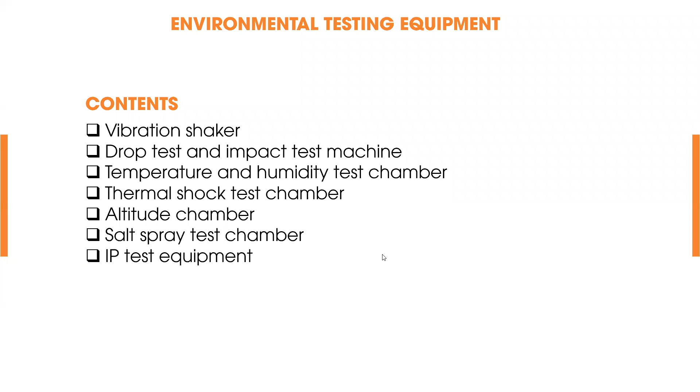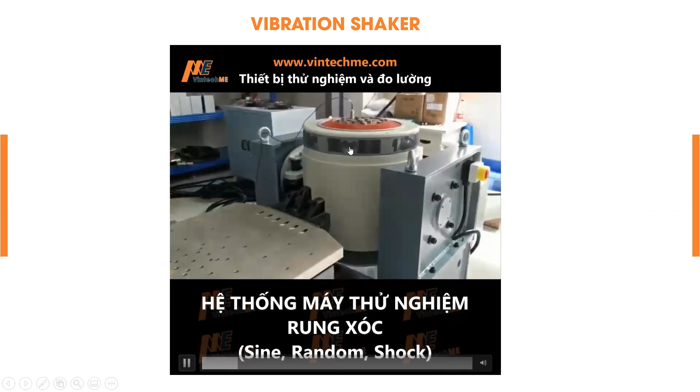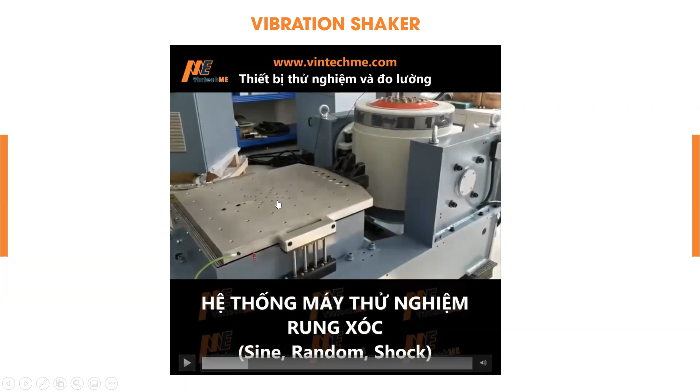So you can see this is the vibration shaker, and this is the sensor, vibration pickup. Now you can see, so it's working. It's vibrating. This is the horizontal table, to make the vibration follow the horizontal direction.

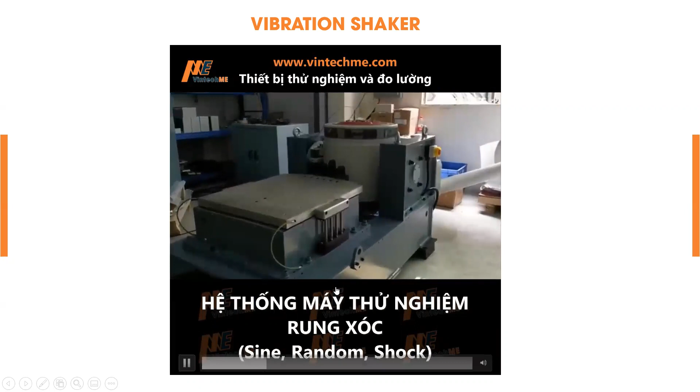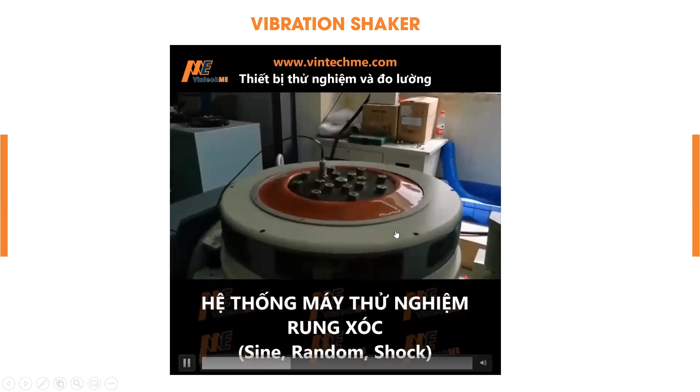Okay. Can you hear the music from the video? Yes. Okay. This microphone is okay.

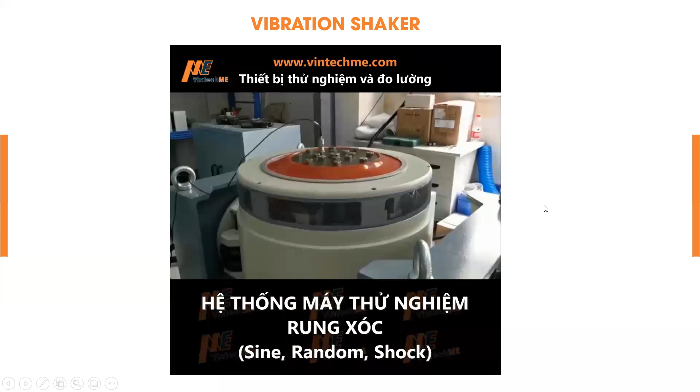Okay. We already finished with the vibration shaker, and now go with the drop test. You can see here, this is the drop test machine. This is a basic drop tester, used for checking the package, a free fall drop test machine. So for example, we need to test some carton box that during transportation has some impact when it's dropped down onto the floor. We will use this machine.

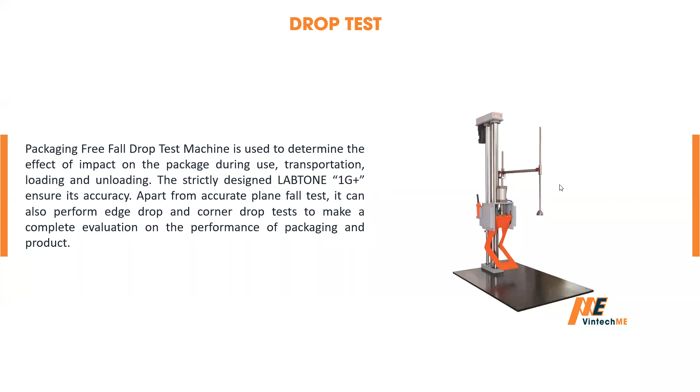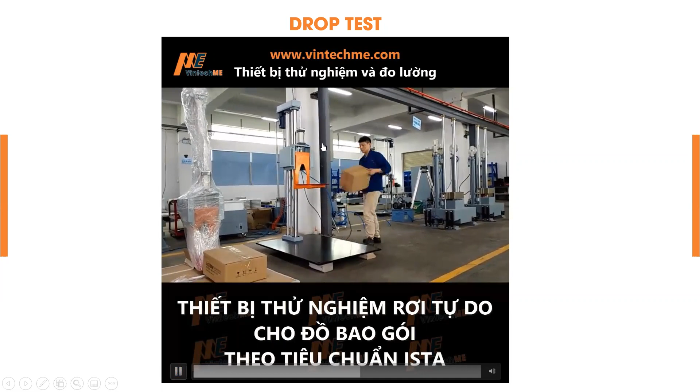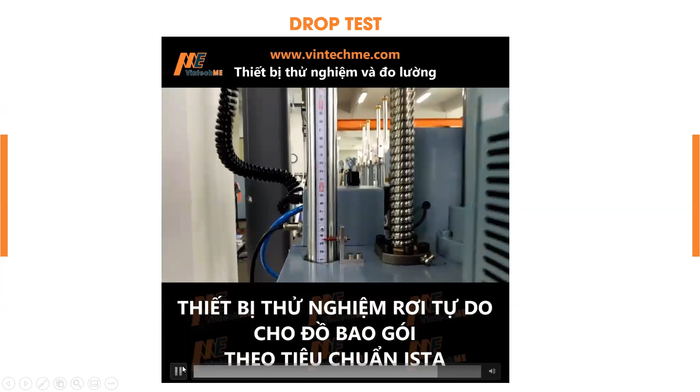Very easy test. Okay, so yes. Now let's go with another, incline impact. Yes, incline impact test. Incline just means nghiêng.

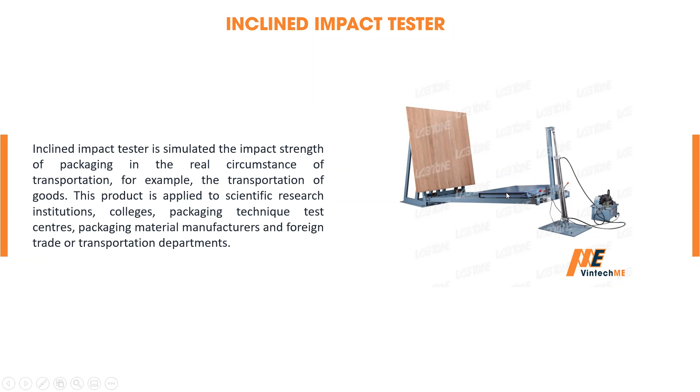So incline impact tests are not popular in companies. In fact, I never saw this one in real life in the test lab, but several companies use this test machine. So this is for carton boxes. Yes, for carton boxes. You can see how it works in this video.

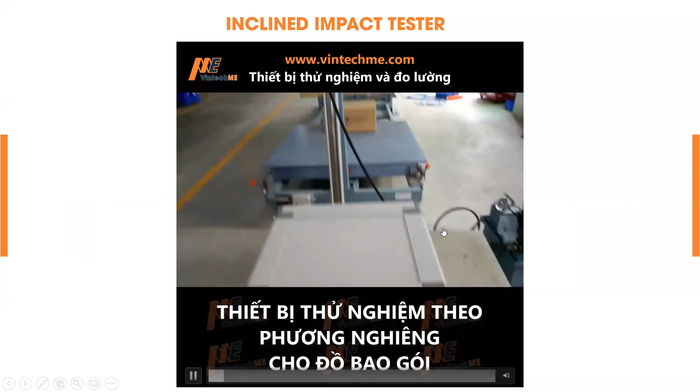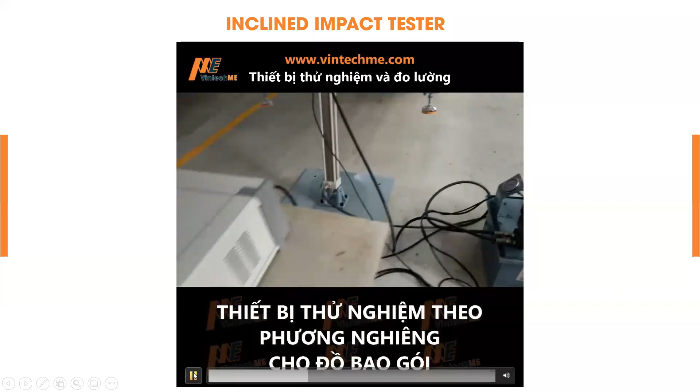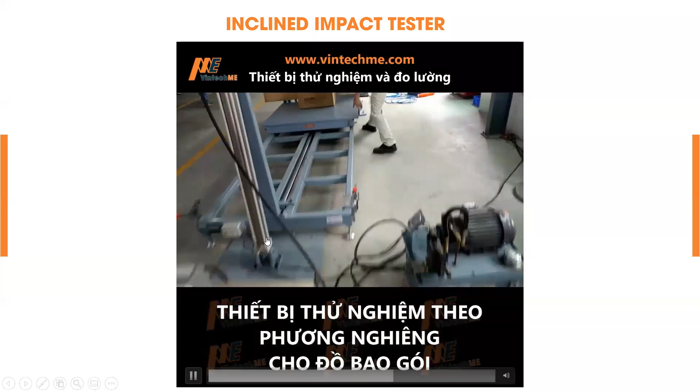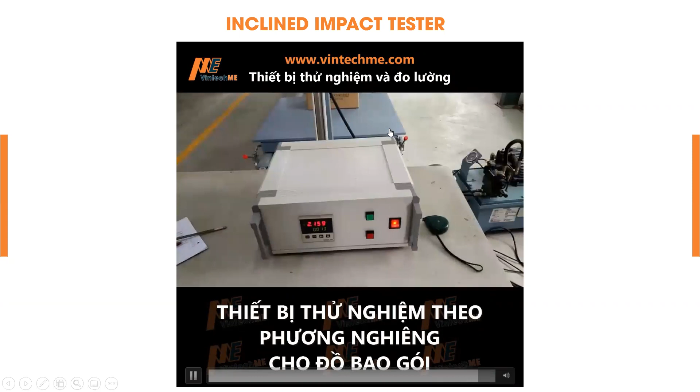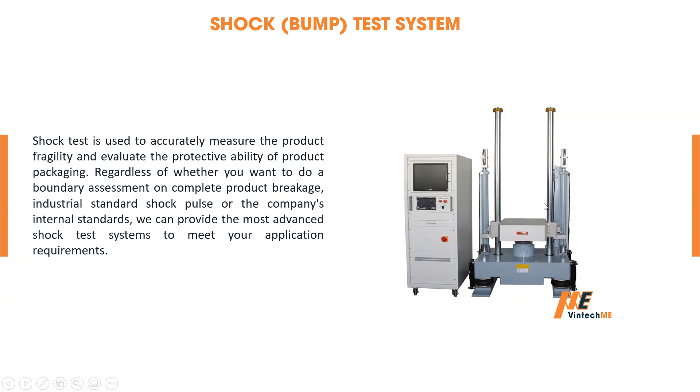So yes, this is a shock test system. And sometimes we call it a bump test system. So this is the table, shock table, bump table, and this is the amplifier to control the shock testing, with an easy structure. Now let's see how it works in this video.

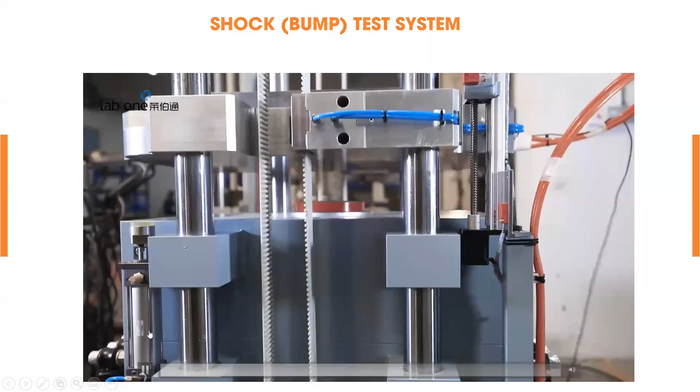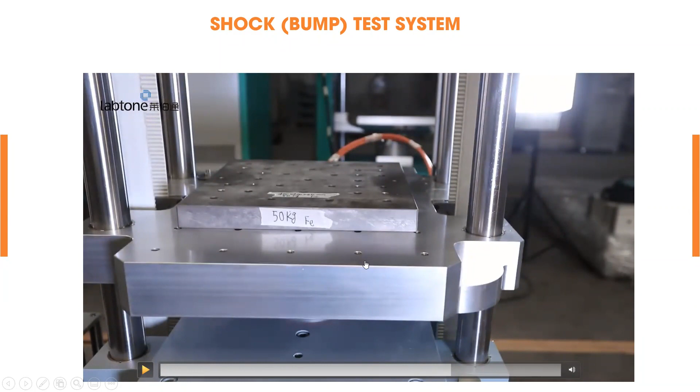So you can see this is a test sample, 50 kilograms. In fact, this is an iron cube. So they attach it to this table. This is the shock profile, the waveform. How to get the waveform? How to calculate? When we perform the testing, we only input and choose the test profile. Yes, I understand. But how to select the profile?

So firstly, it's not difficult. I think it's easy, because in the software we can put in some data. The programmer kit is very important. But this mechanical one is different from other shock, because with mechanical it's not easy to calculate how much acceleration, how many G, to calculate and to program in the software.

For example, UN 38.3 requires 150G and a duration of about 6 milliseconds. But in fact, when you test, the display is not the same, the value is very different. So normally when I performed testing when I worked for IMV, to perform the shock test I would do a trial test first to check whether the profile is the same or not.

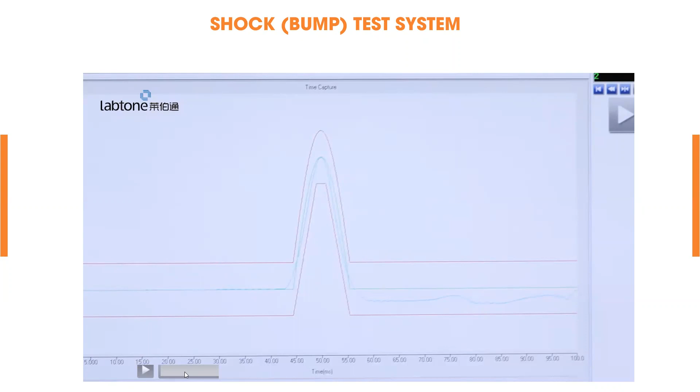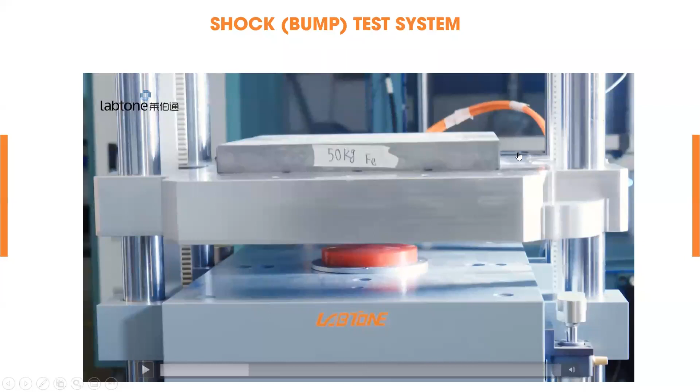In fact, with bump test, mechanical shock test, I have not used it before. Yes, this one is not popular. But this machine is very expensive. I see. I can explain the program later for you if you want more detail. Okay, I can continue.

This one is the thermal shock test. I think it's not popular. Normally, a thermal shock test chamber is very expensive. You can see this is the thermal shock test profile. From hot to cold is a very fast time. This is minus 40, increasing to 120. After that, suddenly down to around minus 40 again in a short time. This is the thermal shock test profile.

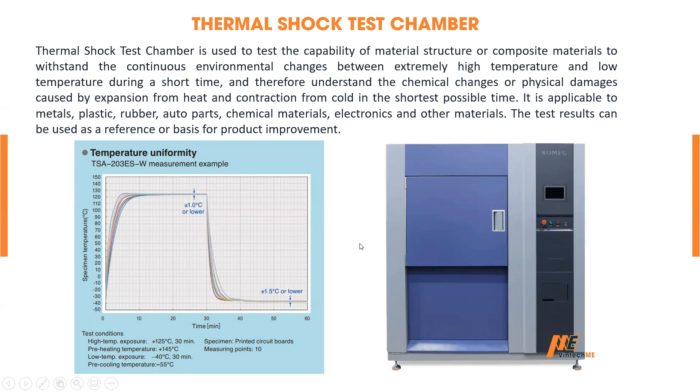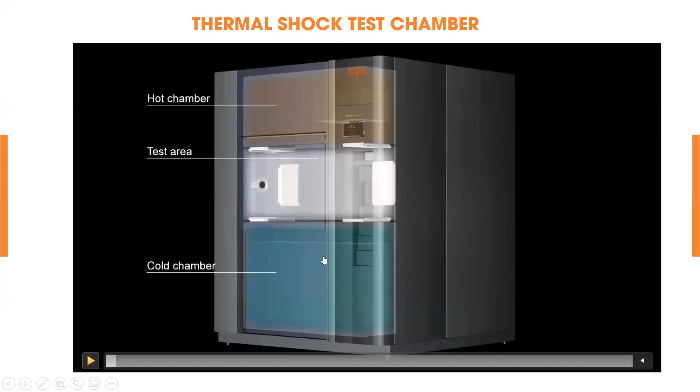We will see the video to explain. Very famous brand, it's number one in the world, very famous. As you see here, the middle area is the test area. We put the test sample or DUT here for testing, and above is the hot chamber to generate high temperature. And this is the cold chamber to generate minus degrees, very cold. This is the structure of the thermal shock test chamber.

You can see here, there is a cable port to bring things inside the chamber. This port is 5 centimeters, very small. So normally it's used for cables, electric cables to supply power to the test sample inside.

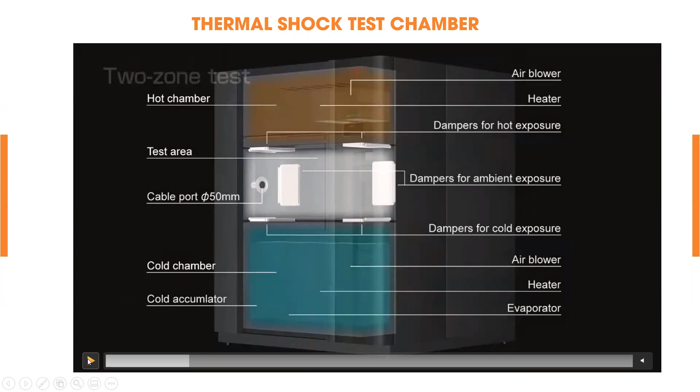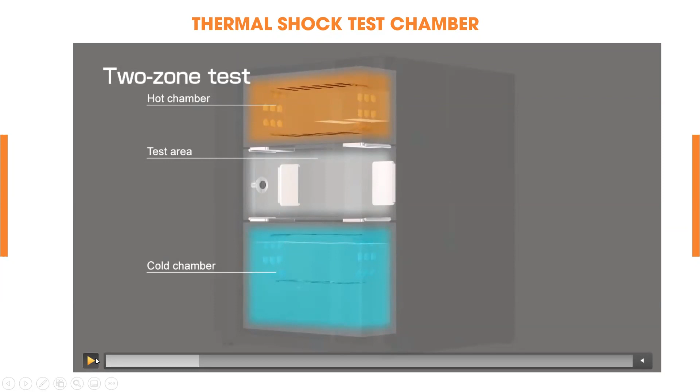When it works, the hot chamber will generate high temperature in this area, and cold temperature will generate here. You can see the gate will open. They work circular like this. Very easy to understand how it works.

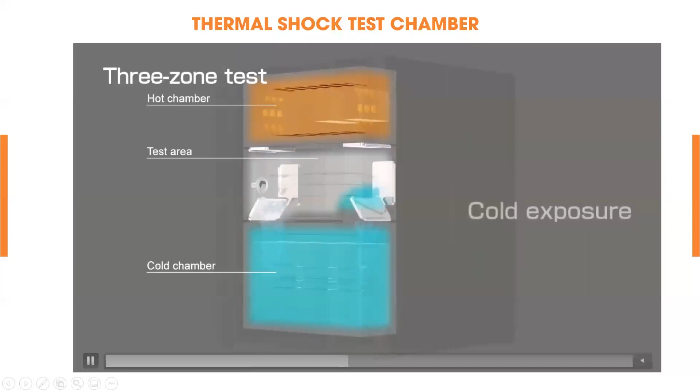Sorry, Mr. Chuang, yeah. I have a question. Sorry to interrupt you. No problem, actually it's for the hot chamber and the cold chamber.

The water can impact the product or not? In fact, we don't use a boiler, so it works the same as a freezer, like a refrigerator. Yes, freezer. But the freezer uses a compressor to compress and generate the cold area here, but not a boiler.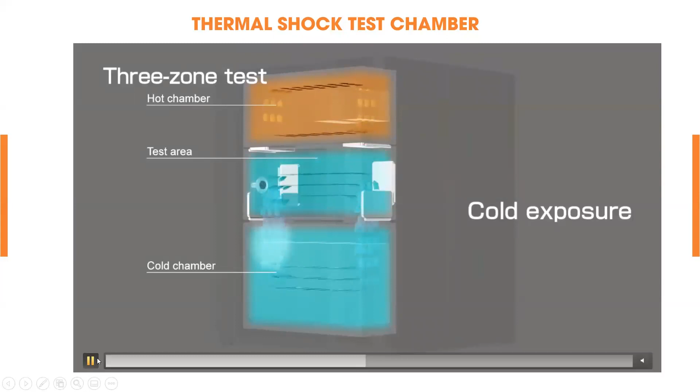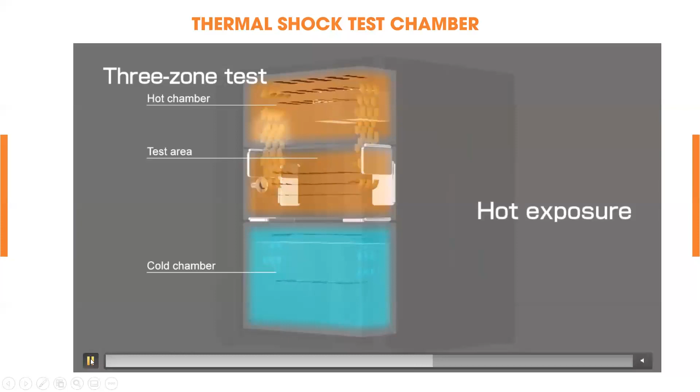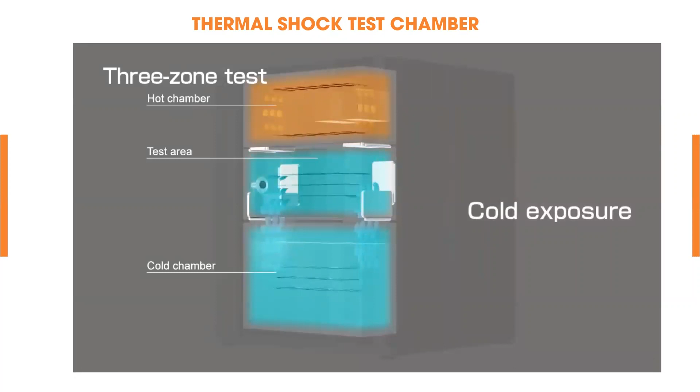Because my customer uses it like this: inside the test area they test the PCB, the device, the contact to the PCB test also provides some electricity into your device to test some function. But actually if there's a transfer, the PCB test and the terminal sometimes have a lifespan issue, and the terminal's lifetime is not good. We're afraid -- not afraid for the device, but afraid for the test system.

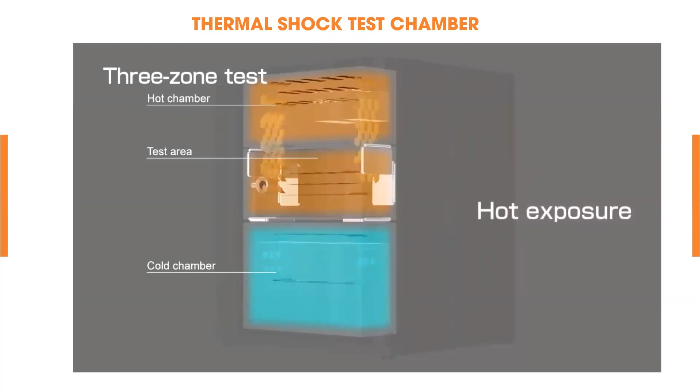I don't think water can affect the PCB directly, because it's not just water, it's the condensation of steam. If we test for a long time, maybe 1 or 2 hours, the steam can touch the PCB and it can become water.

Inside the chamber, on the top cover, in that case we just add a heater on the top cover of the chamber. We put on the heater, so when the internal air inside the chamber moves very fast, it goes to the top of the chamber, but the top cover stays warm, so there's no water. That's the solution. Understand? Yeah, understand, thank you.

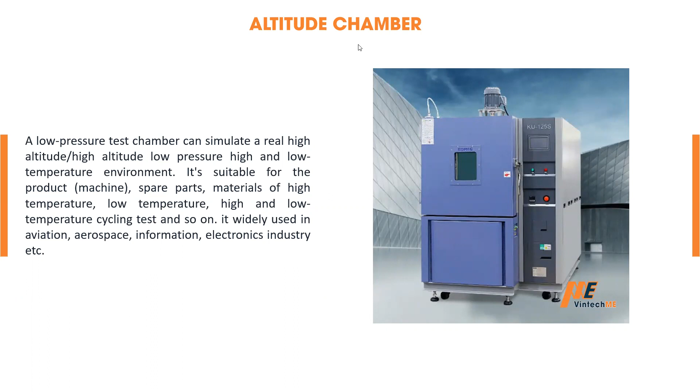I think it's not only mobile phones, electric and mechanical products are the same. Yes, correct, but I gave the example of automotive and electronics. Yeah, this one can perform testing for many test objects. Yes, but I only gave, for example, mobile phone.

So the next one, I would like to introduce IP, international protection, or ingress protection, IP. This IP code is very popular, maybe you already heard about IP codes from somewhere. For example, with a mobile phone, with IP level 67 - so what does this mean?

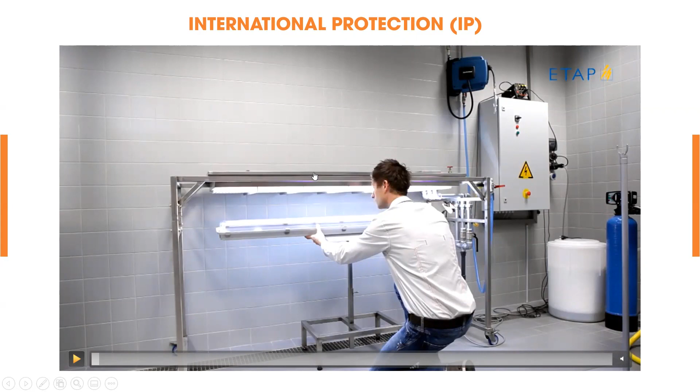You can see here. So this is a test object, duty LED lamp. You will see here, and this is the rain tank, normally called the drip box.

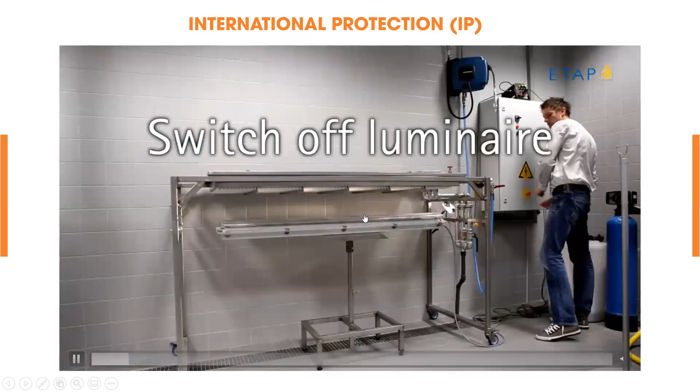Now turn on. Open the water. Yes, so this is IPX1 and IPX2. IPX1 is just vertical falling drop, and IPX2, the water will splash up at an angle of 15 degrees.

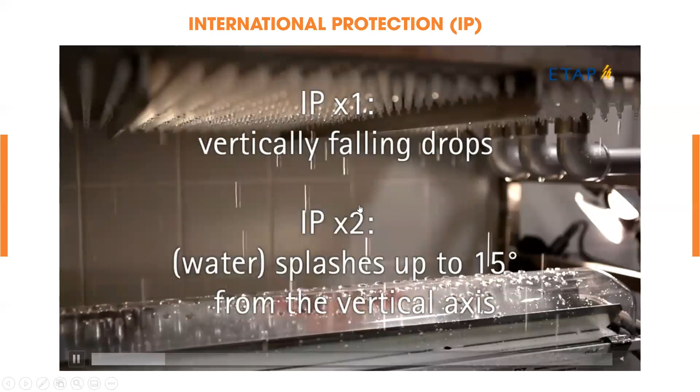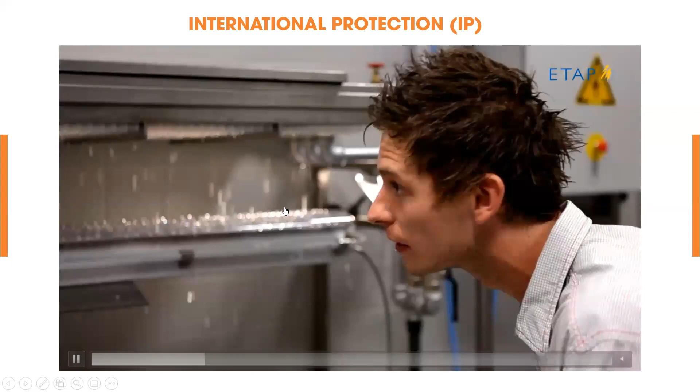This is the test object here, under the drip box. Water is dropping here. This is IPX1.

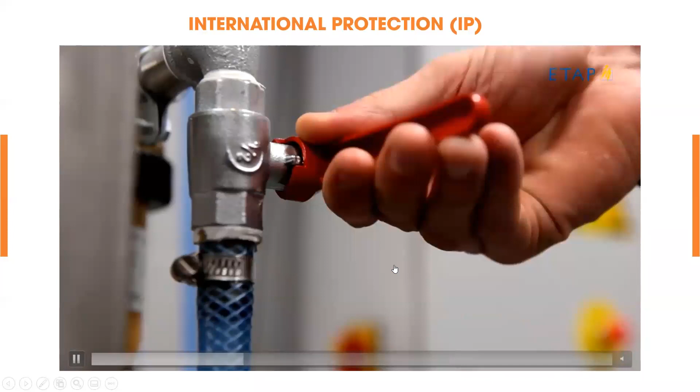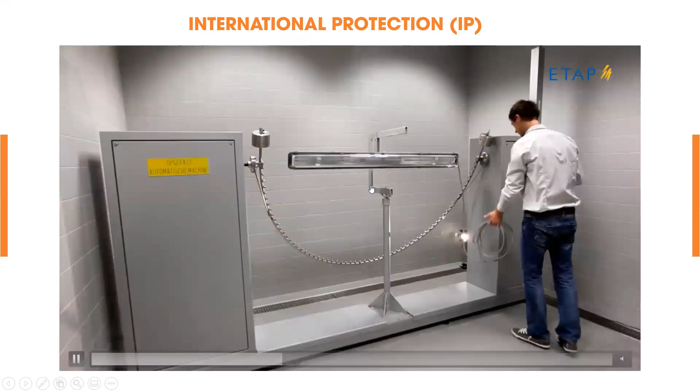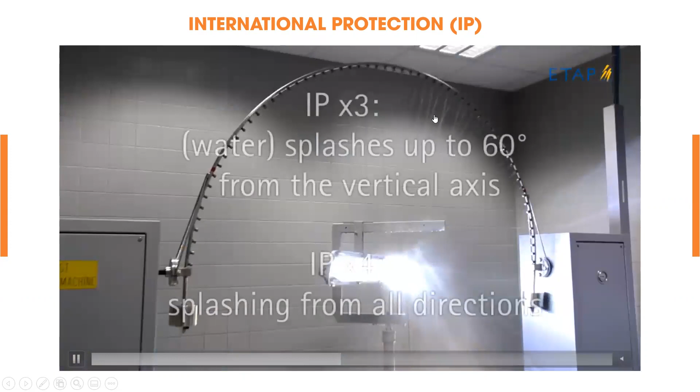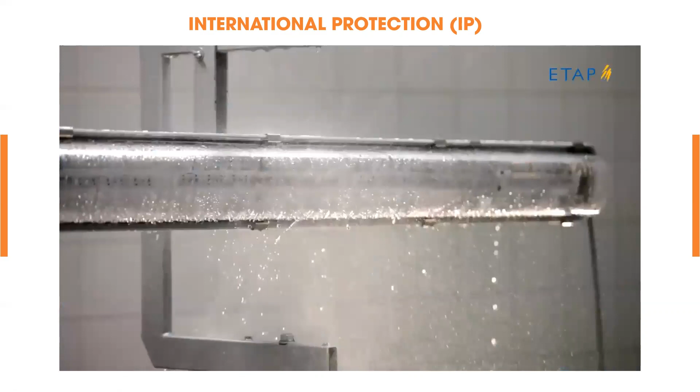You can see, yes, so the testing is performing. This is the IPX5.

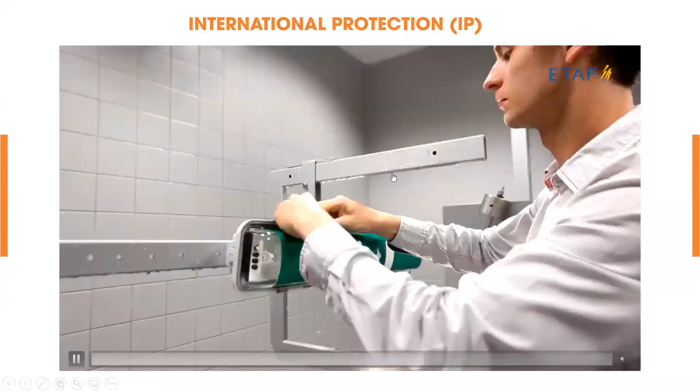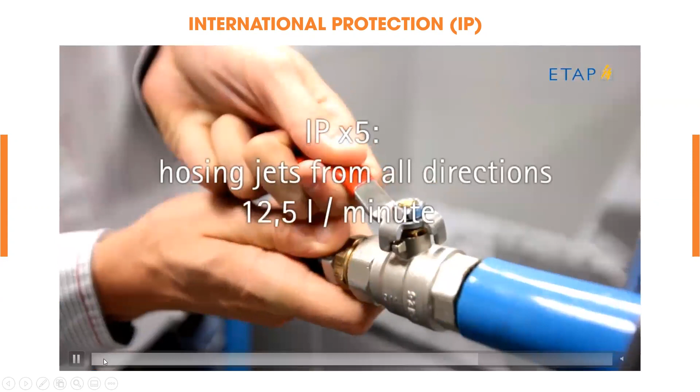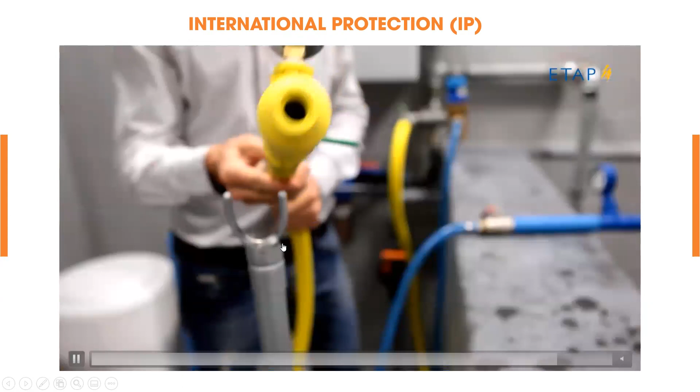This is a test object, LED lamp. Emergency LED. This nozzle here is IPX5. The nozzle will spray water onto the test object. It is a nozzle. This one is bigger, with the diameter inside bigger.

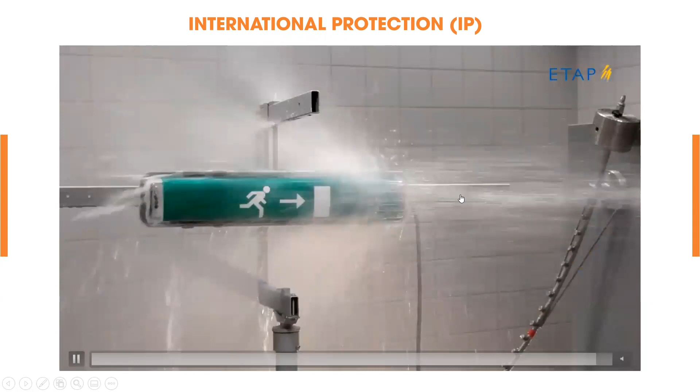We have IPX6. You can see the water is more. Already done with the IPX testing.

I have a final, the last video will show you about the test lab for laptop, Dell laptop. Please see it.

To take on your world with confidence, Dell rugged laptops are built to withstand the world's harshest environments. Whether your workspace is a conference room, a one-man office, or a war room, you can see this laptop work under military and firefighting environments too. Rugged gets the job done.

Even if your workspace is in the corner office. Underwater, no problem.

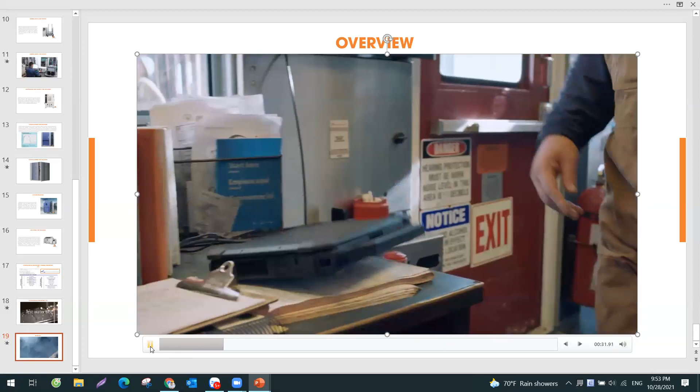What we do in this lab is test to fail. We subject our computers to a variety of tests, making sure that it doesn't fail out there in the field. We're proud to be the only Tier 1 tech solution provider in the rugged space.

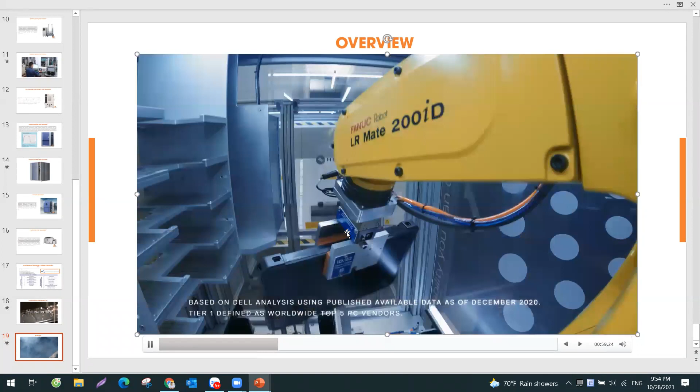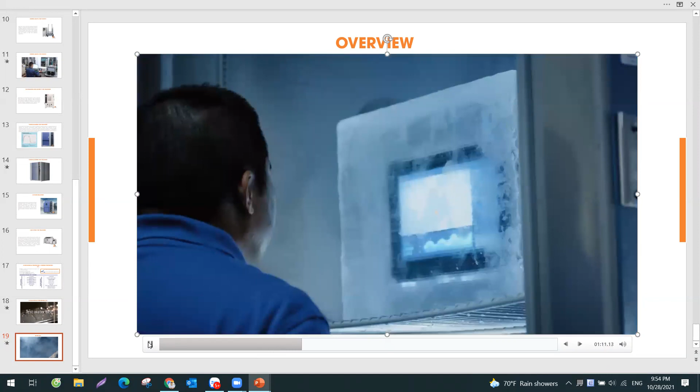Let me show you. In our thermal testing chamber, we test our computers all the way down to -29 Celsius. In that kind of cold, you never want to wait. You can see the computer inside under -29 degrees Celsius, with ice around the computer. For your computer to boot up.

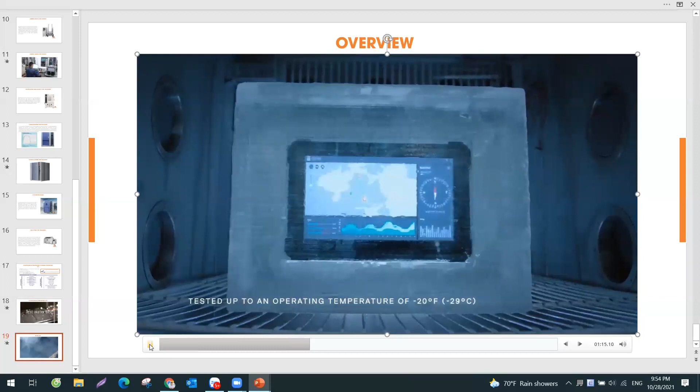But the computer is still working. Why do we test our machines at 145 degrees in our extreme heat chamber? These are mission-critical units being used by law enforcement, the military, first responders, and we never want them to fail during the heat of battle.

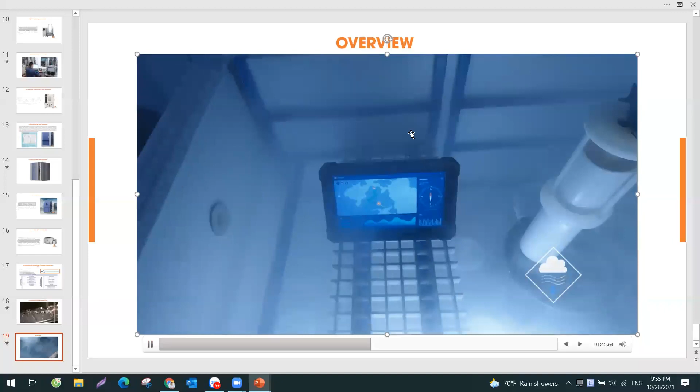One of the hardest tests in this room is the salt fog test chamber. Imagine subjecting units - you can see here, this is the salt spray test chamber - into a 5% brine atomized in the form of a mist. It's to simulate those coastal environments out there in the field, when you work on a boat or ship.

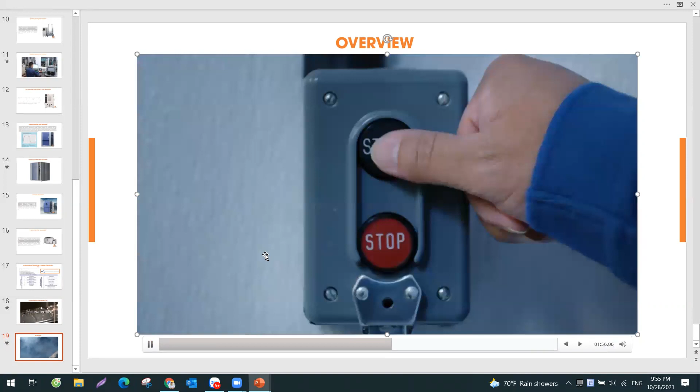Here in the test lab, we have this water test cannon where we blast water on top of the product at 12.5 liters per minute at 2.5 psi. What we're trying to do is jet water onto the product itself, making sure that the unit remains sealed, ensuring that it survives that kind of environment.

We also have the dust chamber. We're trying to suck dust inside the seals. We make sure not a speck of sand, dust or debris breaks through the electronic seal to compromise our unit.

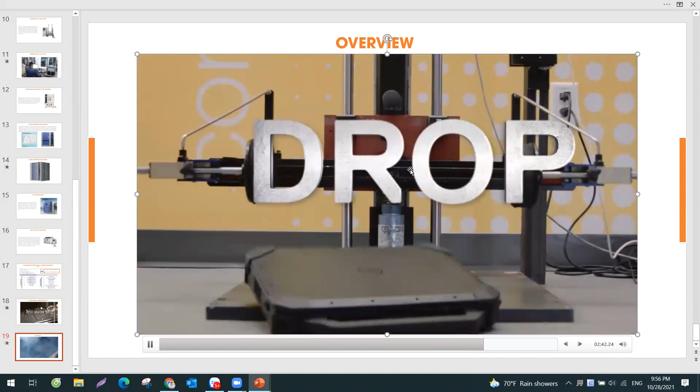Here in this lab, we have this transit drop machine. We test these units at these heights for extreme accidental drops at very high points. And we don't stop there - we have this micro drop machine, and what it does is mimic someone dropping their unit on top of a countertop over and over again to make sure it's built with backbone.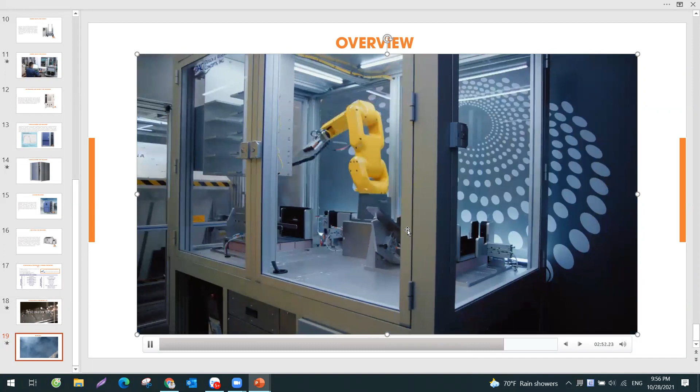Another test is what we call the vibration test. We know these units get deployed in some sort of vehicle, so we're gonna try to mimic those types of environments, making the design even more robust. In here, the harder you push us, the stronger we become.

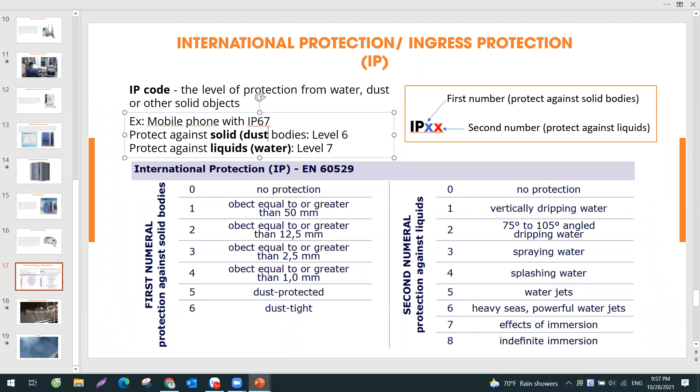Yeah. You have mentioned IP protection, and you mentioned the second number, but how about the first number? First number, that's dust protection. Yes. But maybe I guess that you don't have any reference or any video related to this protection.

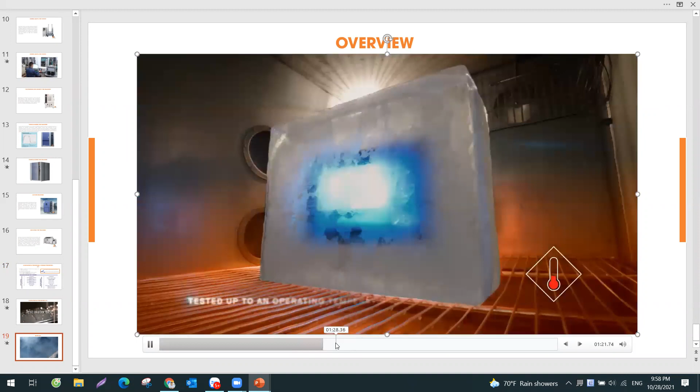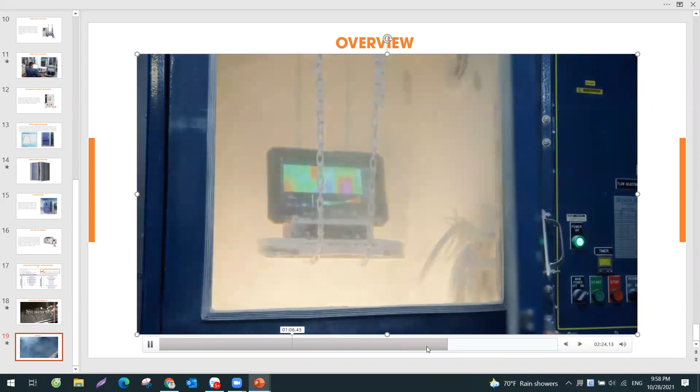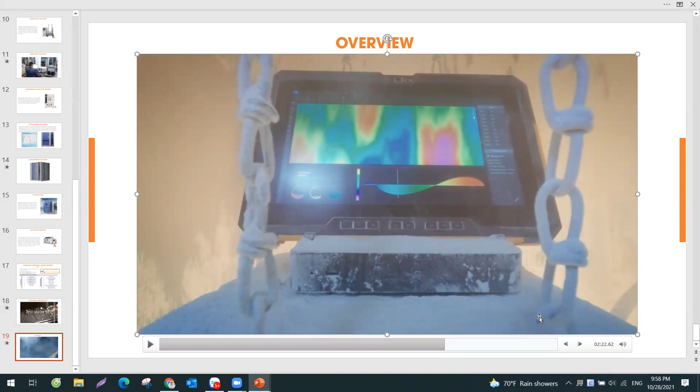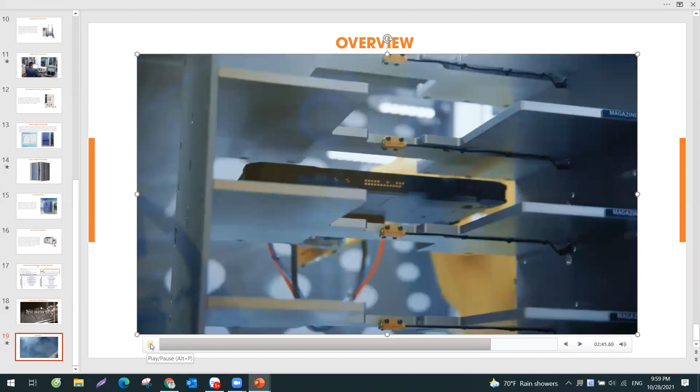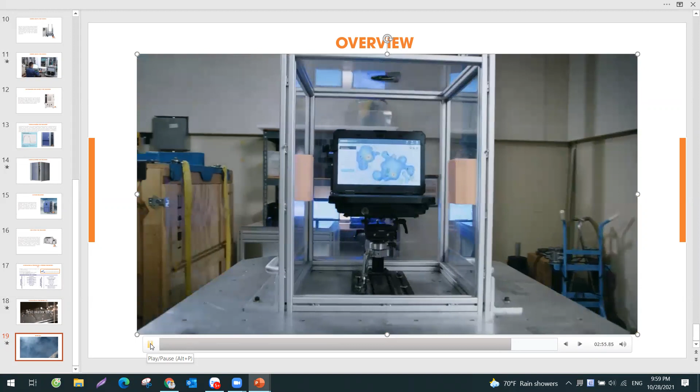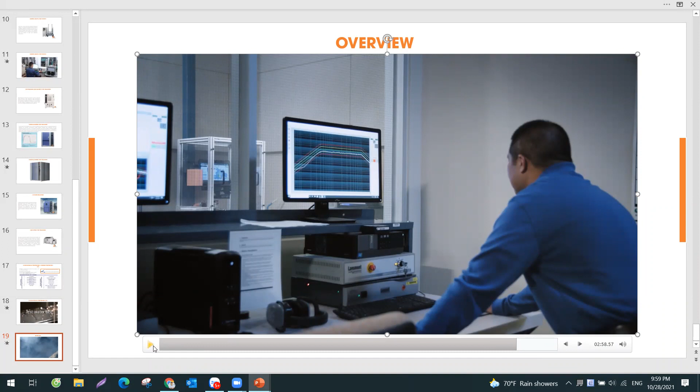Here in this lab, we have this transit drop machine. We test these units at these heights for extreme accidental drops. And we don't stop there. We have this micro drop machine, which mimics someone dropping their unit on a countertop over and over again to make sure it's built with backbone. Another test is what we call the vibration test. You can see a vibration profile here. We know these units get deployed in some sort of vehicle, so we try to mimic those environments, making the design even more robust. In here, the harder you push us, the stronger we become.

So this is a very good video to show the environment. Yes, environmental test equipment.

Another question? If there are no questions, we can move on. Sorry, Mr. Trường, I have a question. Yes.

Can I ask how many times we have to do a test? For example, the drop test. How many times do we have to do a drop test to qualify the product as passing? So to perform the testing, first we check the test standard. The test standard shows how many times to perform the test. For example, some tests need only one drop, but some need two or three drops. So we base it on the test standard. Okay.

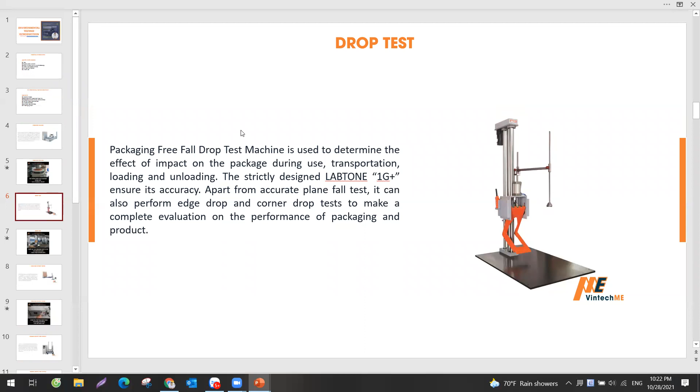Yes, my name is Vũ Việt Triệu. I'm a sales engineer at Vintech company in Vietnam. Our company specializes in supplying testing equipment and education equipment for universities and companies. Our company supplies vibration equipment, shock equipment and incline equipment from Shinken in Japan.

For almost all Japanese brands in Vietnam and electric companies in Vietnam like LG Vietnam, Samsung Vietnam, and some other overseas companies such as BBCPS Vietnam, SCS Vietnam. And some education equipment to universities in Hanoi and Ho Chi Minh City, almost all technical universities for automation. Too many services, too many products. No, I'm only in charge of reliability test equipment. Education equipment is someone else's charge.

So how many years? Can you tell again what you're in charge of? I'm in charge of testing equipment, reliability equipment. Reliability, right? Vibration. Okay. Correct. So how many years have you worked in your field, Mr. Triệu? I've been working from 2000 to now. Wow, more than 20 years. It's a long time.